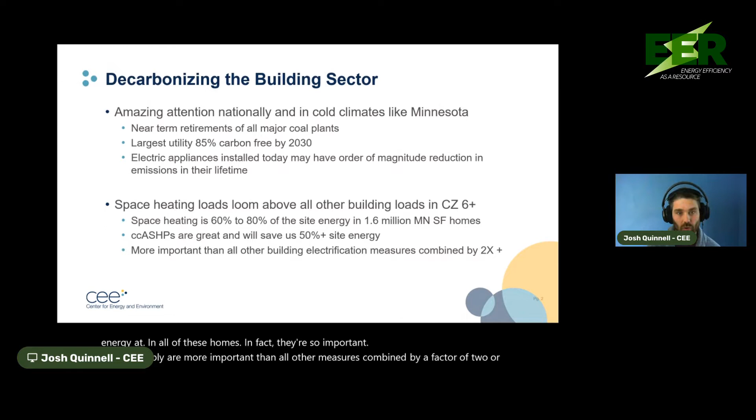But in climate zone 6 and 7, there's only one thing that ultimately matters: space heating load. Our single family homes, all 1.6 million of them, use 60 to 80% of their total site energy budget heating those homes. Cold climate air source heat pumps are a phenomenal opportunity to save 50% or more site energy in all of these homes. In fact, they're probably more important than all other measures combined, by a factor of 2 or greater. It's hard to understate how important the space heating load is and the electrification opportunities from heat pumps.

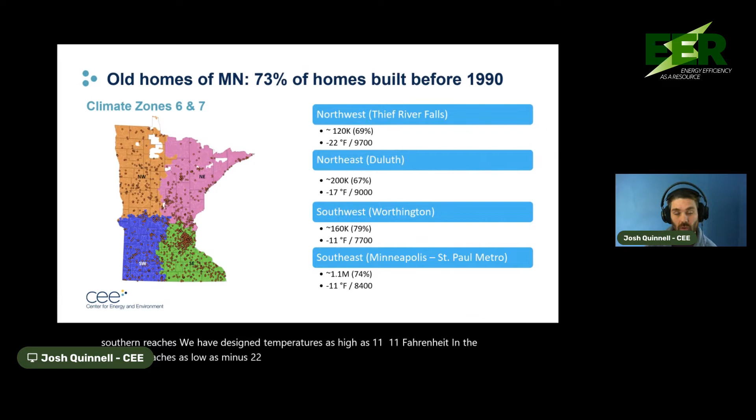Let's talk a little bit about our building stock. 73% of our homes were built before 1990. Our climate, while it varies between climate zone 6 and 7, does see some variation. In the southern reaches, design temperatures are as high as minus 11 Fahrenheit; in the northern reaches, as low as minus 22 Fahrenheit or even lower. Our winter heating load can be defined by heating degree days between about 7,700 and 9,700 statewide.

It's important to call out the southeast specifically. This is where most of our homes are located, corresponding to the Minneapolis-St. Paul metro area. There's about 1 million homes here.

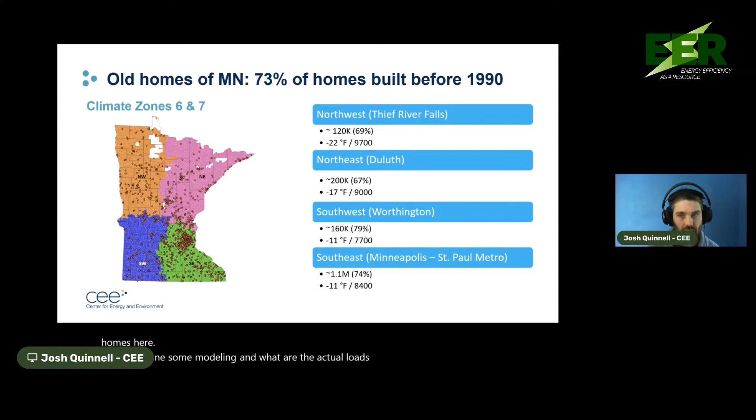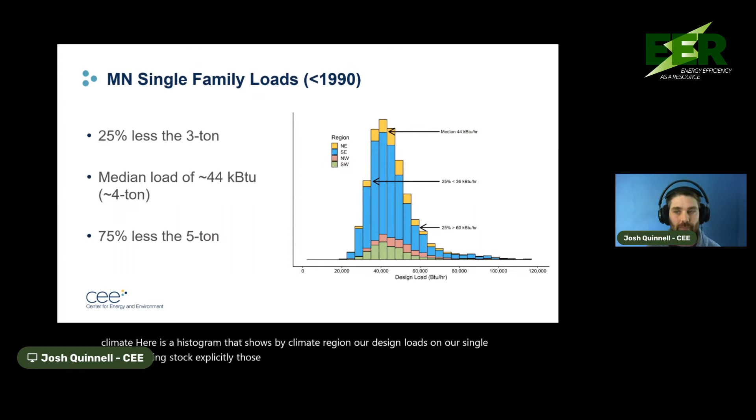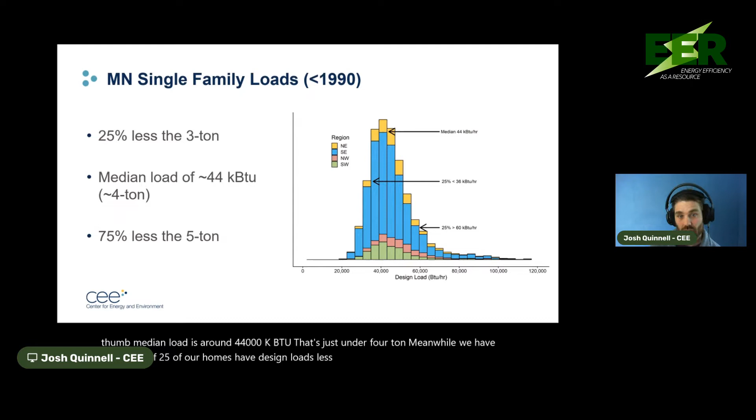So we've done some modeling: what are the actual loads on these homes across our climate? Here is a histogram showing, by climate region, our design loads on the single family building stock built before 1990. The good news is the loads are a lot smaller than we conventionally expect from our rules of thumb. Median load is around 44,000 BTU, just under 4 ton. About 25% of our homes have design loads less than 36,000 BTU, or 3 ton, and only a quarter have design loads greater than 5 ton.

So when we talk about meeting these loads, we need to look at the heat pumps available. I'm showing 3 kinds of heat pumps, a couple in both 3 ton and 5 ton capacity. First is the reference tier, shown in blue curves, plotting capacity as a function of outdoor temperature. We know air source heat pumps lose a fair amount of capacity as it gets cold outside, but the reference tier are variable speed cold climate heat pumps that are strong performers, maintaining fairly good capacity down to 5 Fahrenheit, though they lose capacity below that.

We have another kind called the Capacity Champ—essentially the highest capacity maintenance currently found in the NEEP air source heat pump database. They do a better job maintaining capacity at cold temperatures with strong COP performance. As an upper benchmark, I've also added a fictional transcritical CO2 heat pump, something we might aspire to in the future, though nothing like this exists now. This system meets 90% of its capacity at minus 25 at a COP of 2—a very high performance standard.

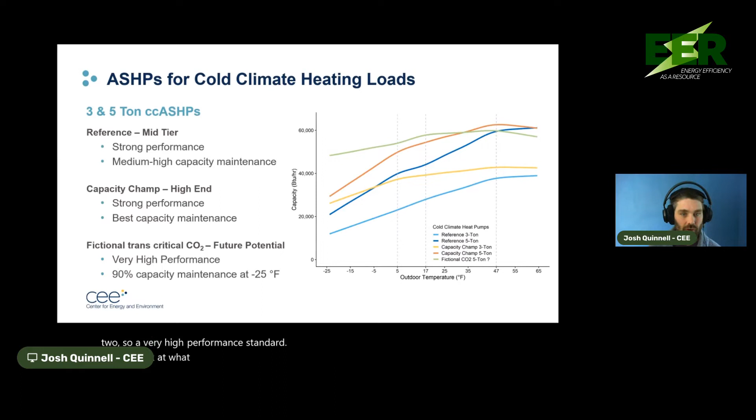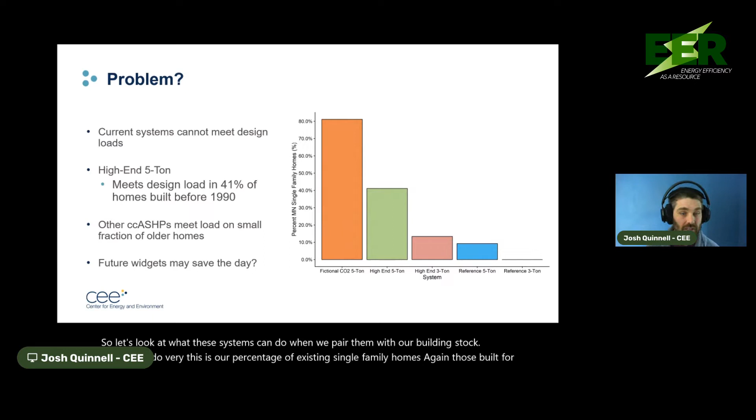So now let's look at what these systems can do when paired with our building stock. Well, they don't do very well. This is the percentage of existing single-family homes, again those built before 1990, whose design loads can be met by these various pieces of equipment. Our fictional system can meet the heating load in 4 out of 5 homes, but that system does not yet exist.

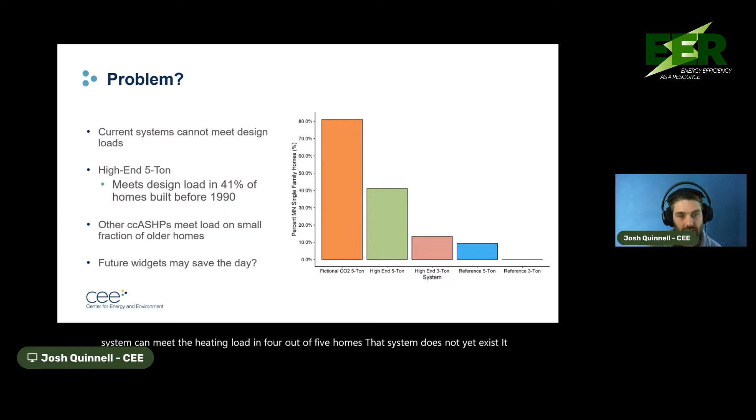It may never exist. If we look at our best system today, the 5-ton Capacity Champ, that can meet design load in about 40% of our existing building stock. All the other systems fare significantly worse. So what's the takeaway here?

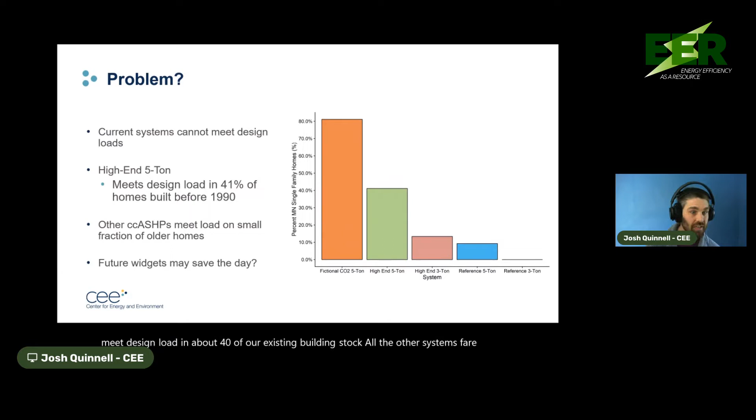We might be saved one day by ultra high performance heat pumps, or maybe we just need auxiliary heat. Here I'm distinguishing auxiliary from backup—we often call it backup heat with respect to air source heat pumps, but when it's electric resistance, I like to call it auxiliary power. Our heat pumps are still going to run in cold temperatures, they just can't put out the capacity our buildings need. So we can supplement that with existing electric resistance, for example a plenum heater that boosts supply temperatures as they tend to fall in cold weather.

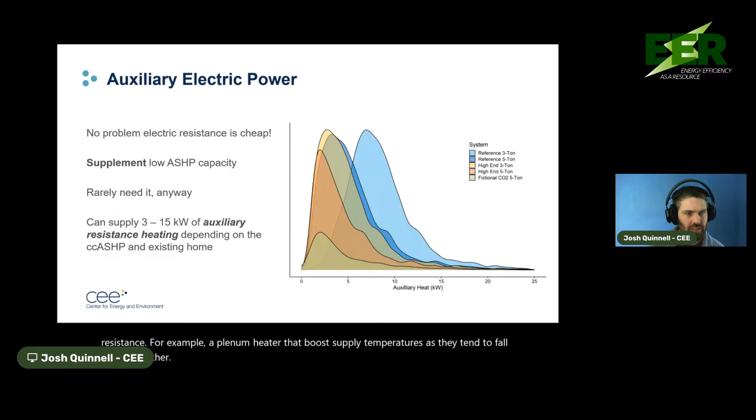This might not be such a big deal because this is our design condition. We rarely need that capacity, maybe 50 hours a year or less.

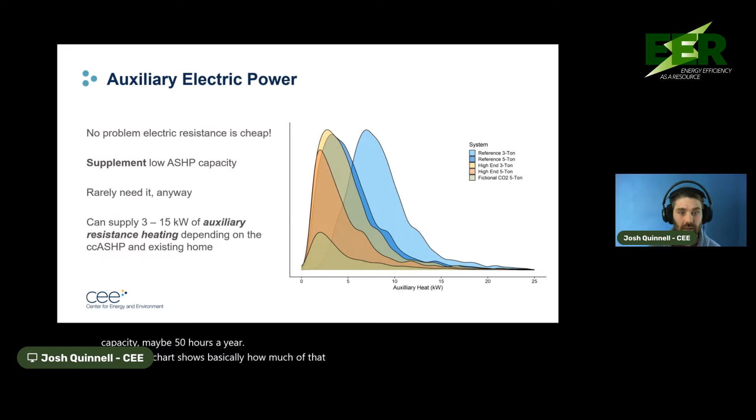This chart shows basically how much of that auxiliary heat we need depending on the systems we install. The bottom line is even this fictional high performance system needs about 3 kilowatts of median capacity across the heating load.

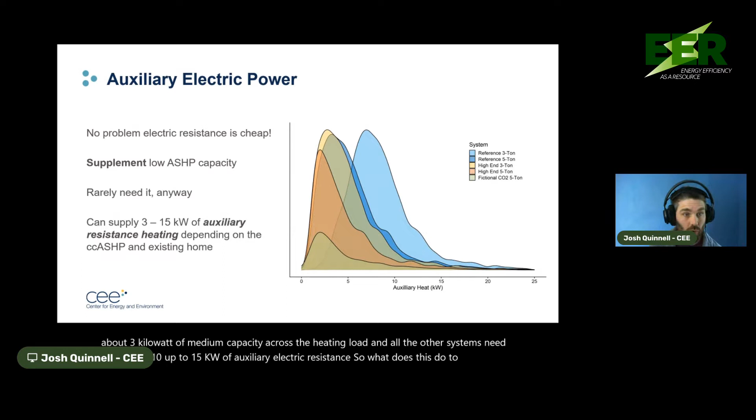And all the other systems need more, 5, 7, 10, up to 15 kilowatts of auxiliary electric resistance. So what does this do to our peak load and the load we're going to eventually ask to be put on the grid? Well, it doesn't look that great.

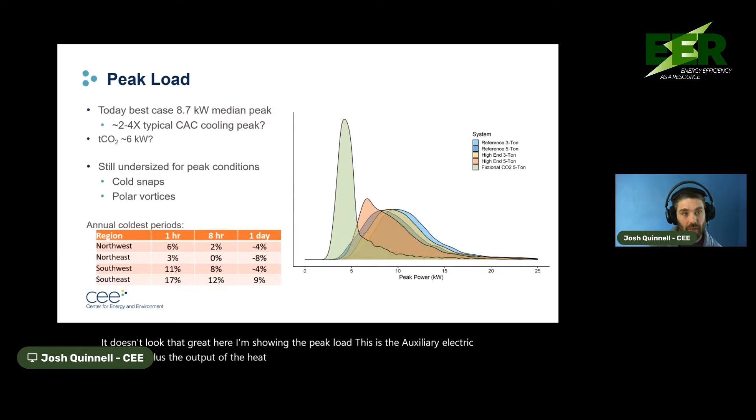Here I'm showing the peak load. This is the auxiliary electric resistance plus the output of the heat pump, the input of the heat pump. Today, if we look at our best case, which is our capacity champ 5-ton system, paired with the necessary auxiliary heat, we're looking at a median peak load of around 8.7 kilowatts.

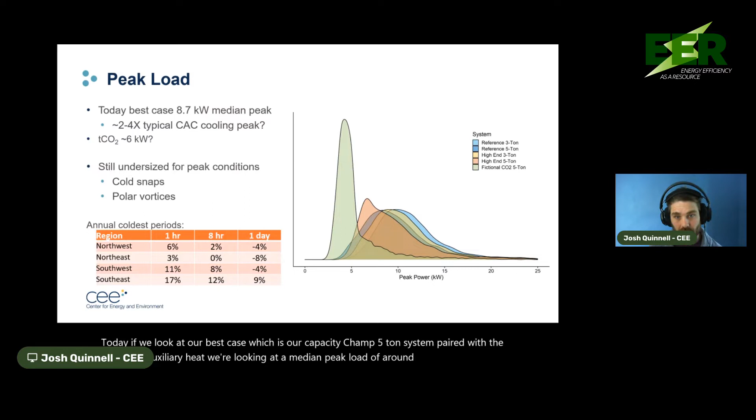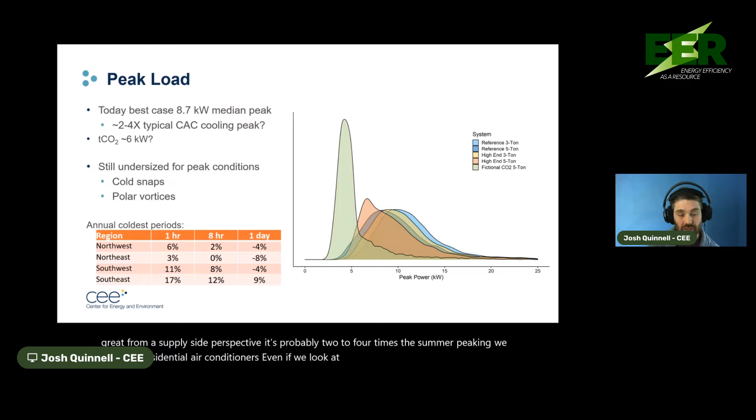This is not great from a supply side perspective. It's probably 2 to 4 times the summer peaking we get from residential air conditioners. Even if we look at this future transcritical system, that's still going to be on the order of 6 kilowatts or greater median peak. And again, this is the median of a population of over 1 million homes.

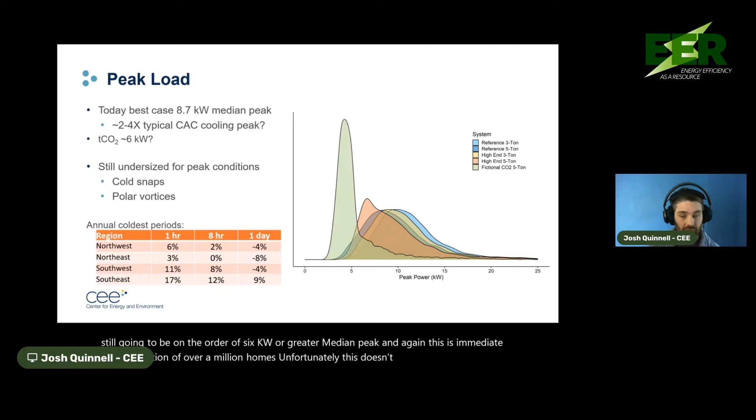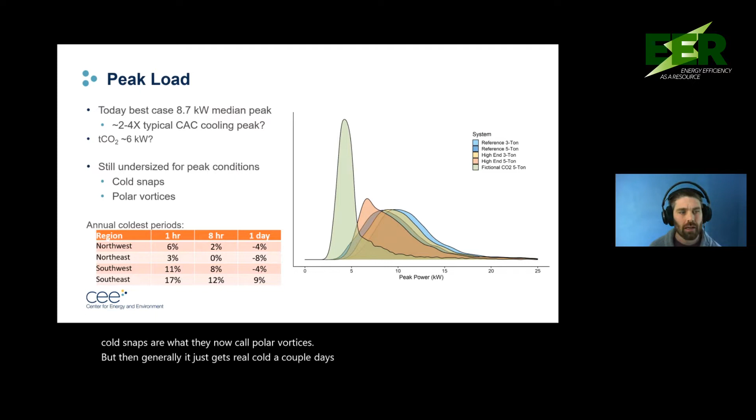Unfortunately, this doesn't quite get it either. We have our design condition, but then we have our peak loads. We have our cold snaps, our what they now call polar vortices. But then generally it just gets real cold a couple days a year in Minnesota. And it gets worse than the design condition.

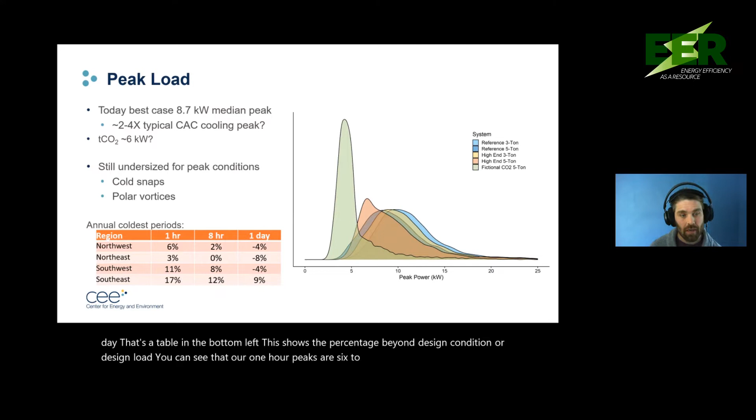If we look at our annual coldest periods by 1 hour, 8 hour, and 1 day, that's a table in the bottom left. This shows the percentage beyond a design condition or design load we get. You can see that our 1 hour peaks are 6 to 17% greater. As we get to longer periods, though, we get closer to a design condition.

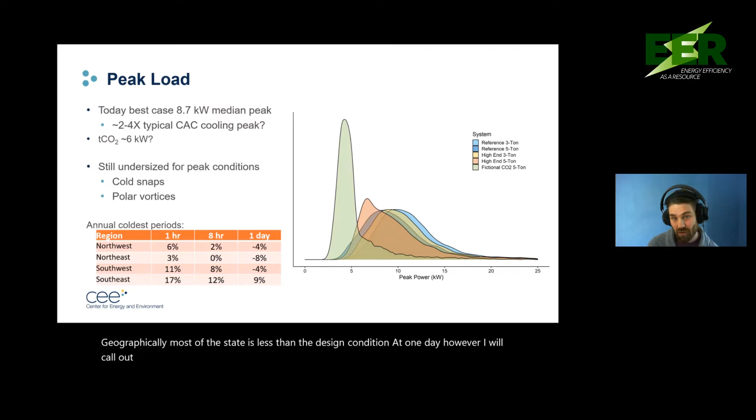Geographically, most of the state is less than the design condition at 1 day. However, I will call out the Southeast. The metro area still is capable of having 24-hour periods that exceed design load by 10%, in which case that 8.7 median peak maybe bumps up to 9.5 kilowatts, which is quite a large load.

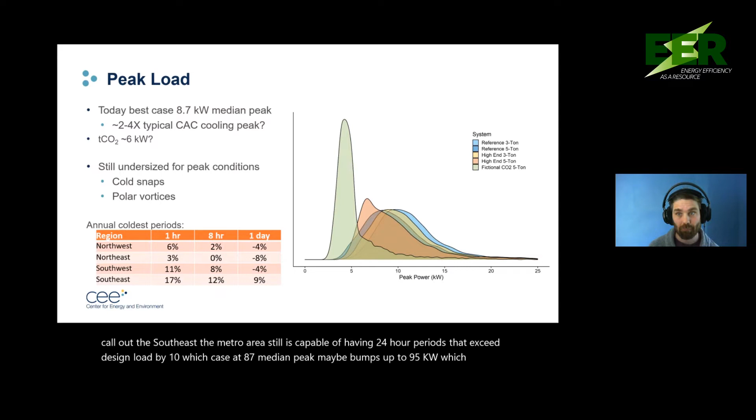So to recap, in the middle here, air source heat pumps are extremely promising for decarbonizing what is our biggest building end use. Unfortunately, the majority of our single-family stock needs substantial auxiliary or very substantial backup. Even with today's best and biggest heat pump, even fictional high-capacity heat pumps will drive unprecedented system peaks.

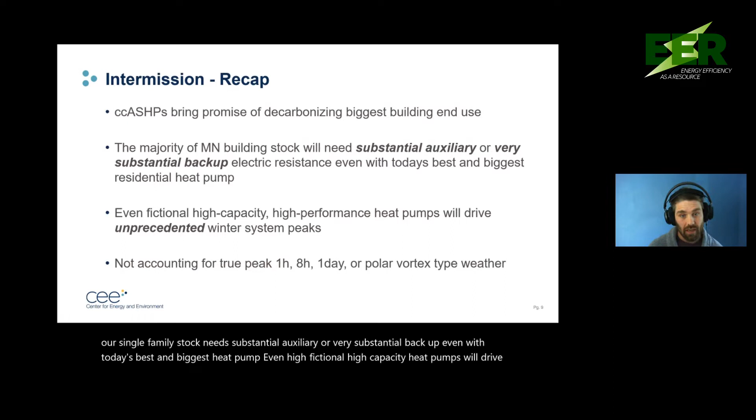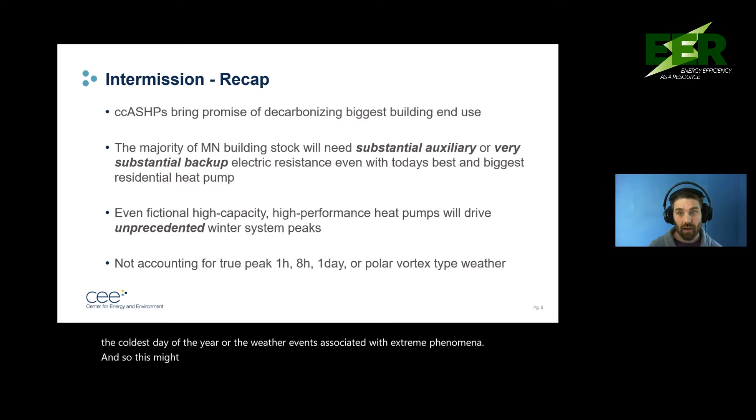And then we have to consider the coldest weather, whether it's the coldest day of the year or the weather events associated with extreme phenomena. And so this might seem kind of dire. It's not, though. Actually, the solution is obvious. It's always been obvious. Maybe you already know from the title of my talk. It's always been about the envelope.

Essentially, we need aggressive weatherization. Weatherization has been extremely successful. We need to weatherize to higher standards, and we need to weatherize on significantly larger scale efforts. And in fact, we probably need to go further and consider actually high performance envelopes.

We have an extremely demanding climate. Low fuel prices have shielded us from the demands of our climate, but we need to think about things like continuous exterior insulation. There's a lot of opportunities to engage these projects in our existing way of doing things.

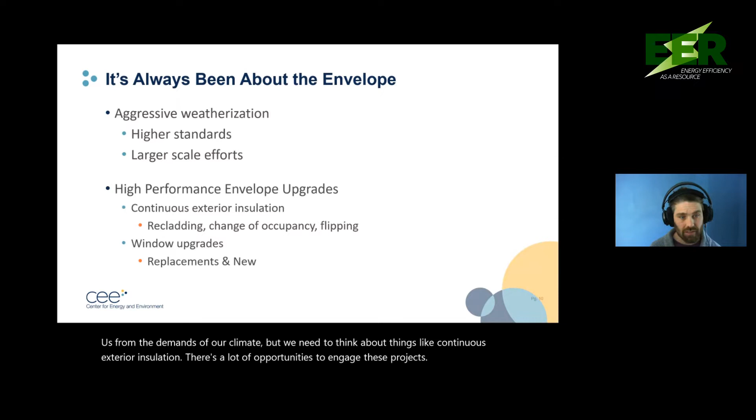We also need to talk about windows. We've been dithering about the cost effectiveness of windows now for an entire generation of windows, and it turns out windows are twice as good now as they are in the existing building stock.

So we have a model. We modeled a bunch of things. I'd be happy to talk with you at length about that.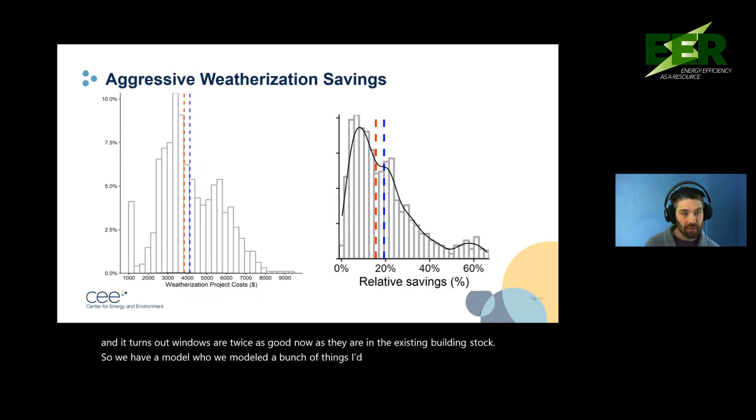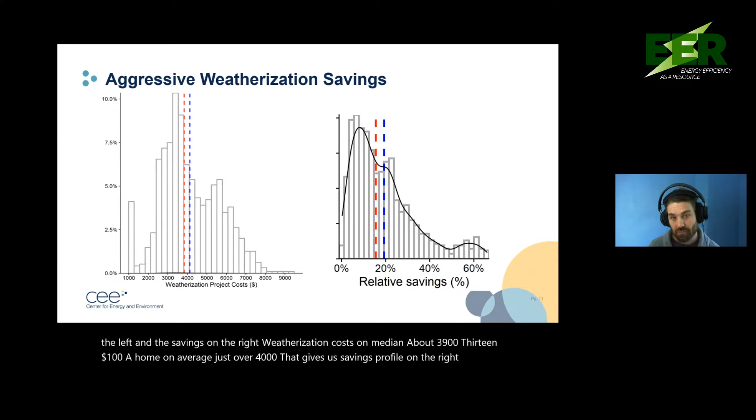This is the bottom line on aggressive weatherization. These are the costs on the left and the savings on the right. Weatherization costs on median about $3,900 a home, on average just over $4,000. That gives us savings profile on the right over about 1 million buildings in Minnesota, 15% median savings, 20% average savings, and a long tail of very low hanging fruit, 30, 40, 50, 60% savings.

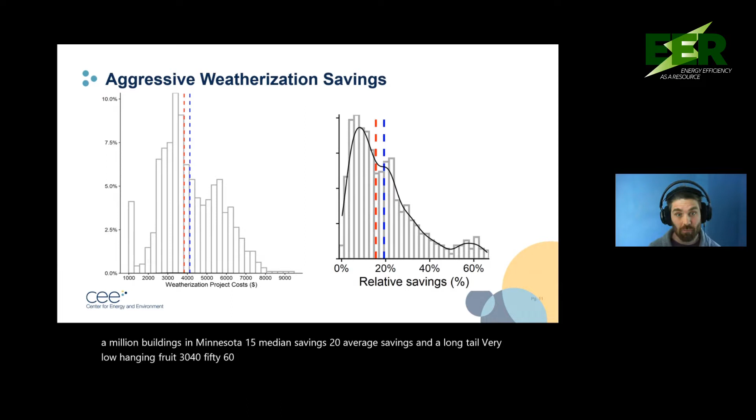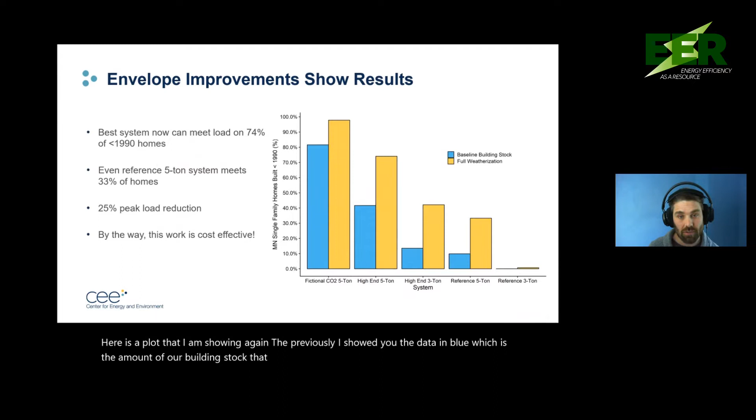And these kinds of savings show tremendous results. Here is a plot that I am showing again. Previously, I showed you the data in blue, which is the amount of our building stock that can be met with these systems. Once we weatherize our buildings, the yellow bars are what we get. So our fictional system did very well. It does even better once we weatherize our homes.

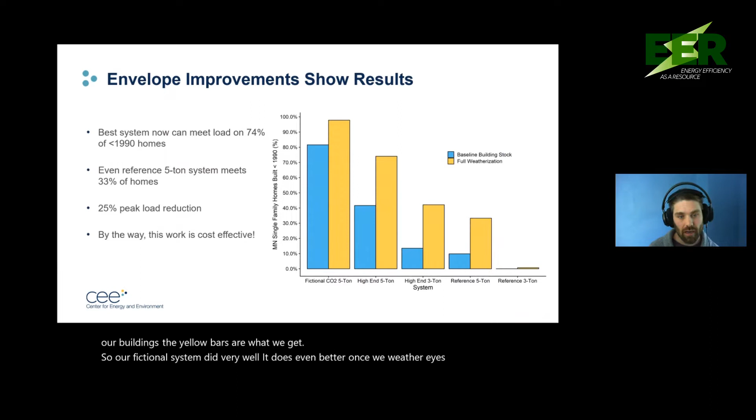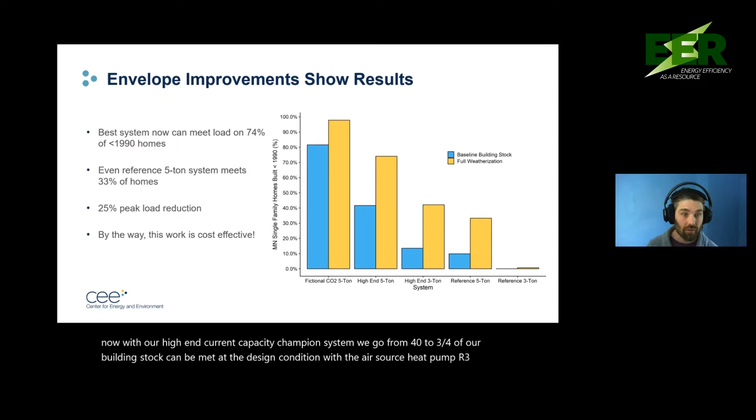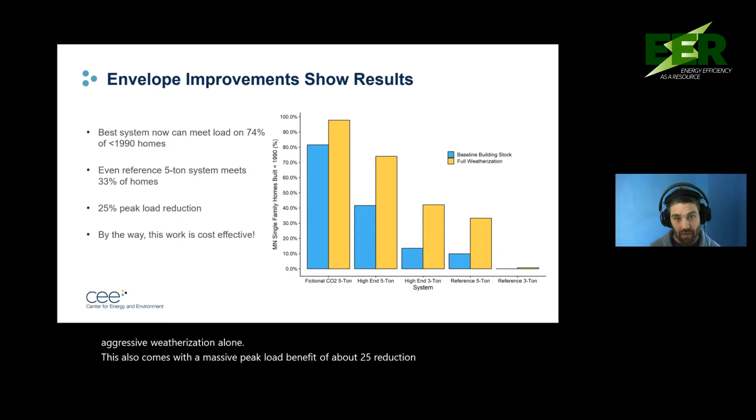But now with our high-end current capacity champion system, we go from 40% to 3/4 of our building stock that can be met at the design condition with the air source heat pump. Our 3-ton and our reference 5-ton are now sitting at 33% and over 40% of our building stock just from aggressive weatherization alone. This also comes with a massive peak load benefit of about 25% reduction in peak load. And by the way, this work is all cost effective today across 1 million homes, according to our application of the current benefit-cost framework in Minnesota.

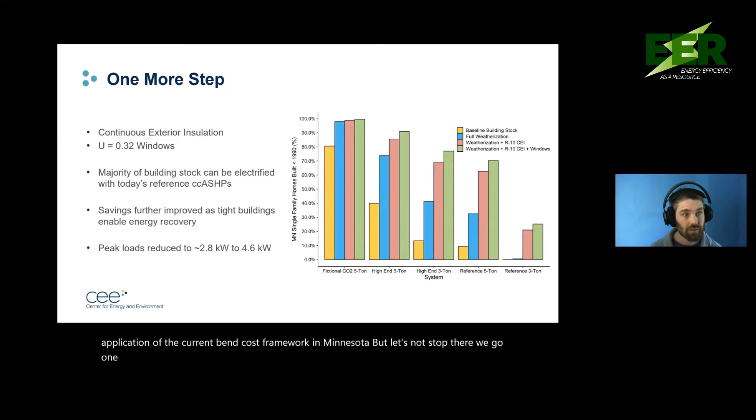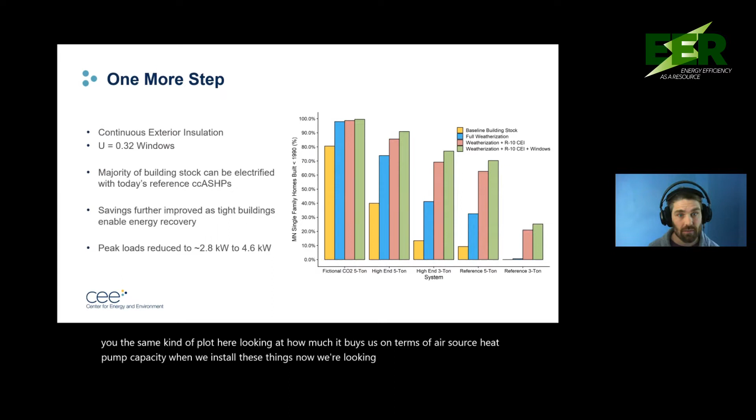But let's not stop there. We got to go one step further and talk about continuous exterior insulation and window upgrades. Showing you the same kind of plot here, looking at how much it buys us in terms of air source heat pump capacity when we install these things. Now we're looking at from today's best systems, upwards of 80 to 90% of the building stock. And even our reference system now sitting at nearly 3/4 of the existing building stock can be met at the design condition with an air source heat pump.

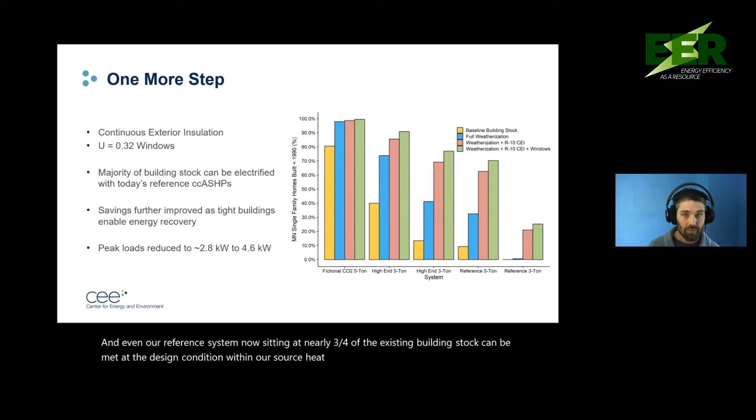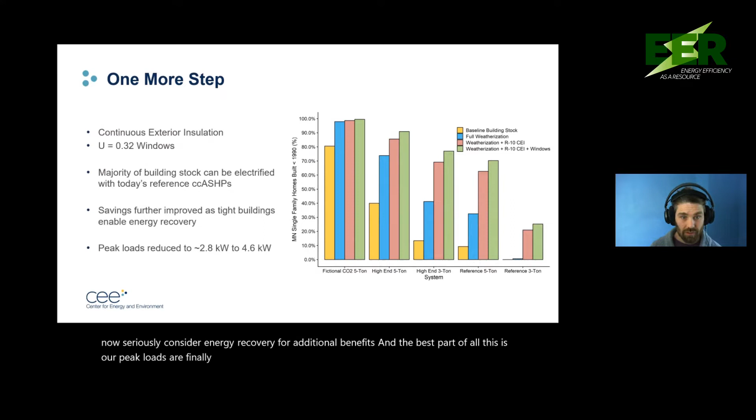This weatherization, this continuous insulation, this also tightens up our buildings so we can now seriously consider energy recovery for additional benefits. And the best part of all this is our peak loads are finally coming down to levels that are more similar to what we see today, 3 to 4.5 kilowatt.

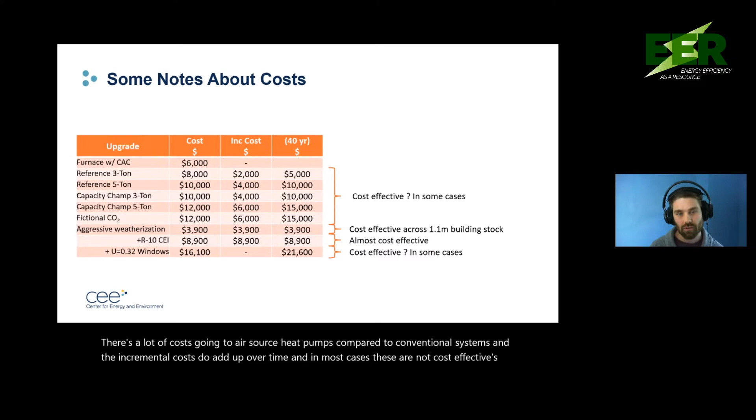One final note here about costs. There's a lot of costs going to air source heat pumps compared to conventional systems, and the incremental costs do add up over time. In most cases, these are not cost effective to save except for propane and electric resistance. Most of our state is heated by natural gas, and this is a real issue with cost effectiveness.

I did mention that aggressive weatherization is cost effective today against propane, electric resistance, and about 20% of our gas heated building stock. Continuous insulation is almost cost effective. There are hundreds of thousands of cost effective opportunities. Windows continue to be a problem.

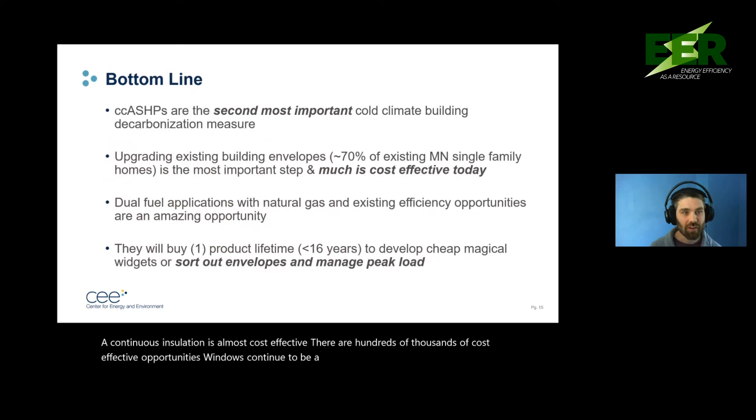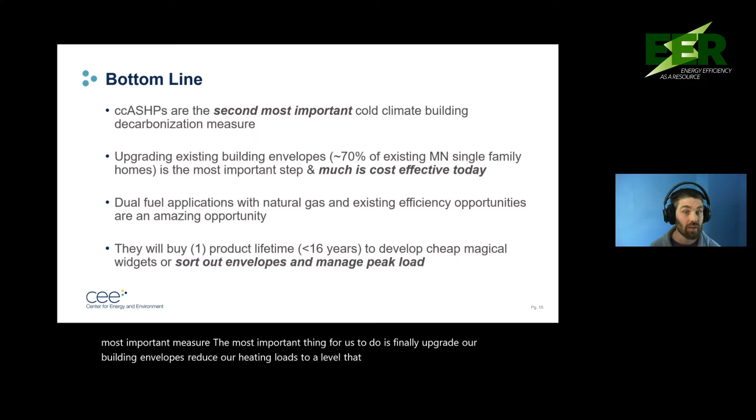I'm running out of time, so I'm really moving here. The bottom line, though, is I misled you up front. Air source heat pumps are not the most important cold climate building decarbonization measure. They are the second most important measure. The most important thing for us to do is finally upgrade our building envelopes, reduce our heating loads to a level that we can meet with heat pumps, that we can meet with supply side investments on our grid.

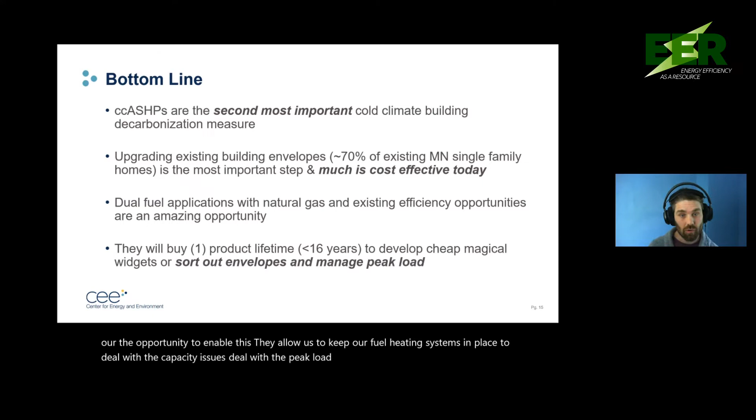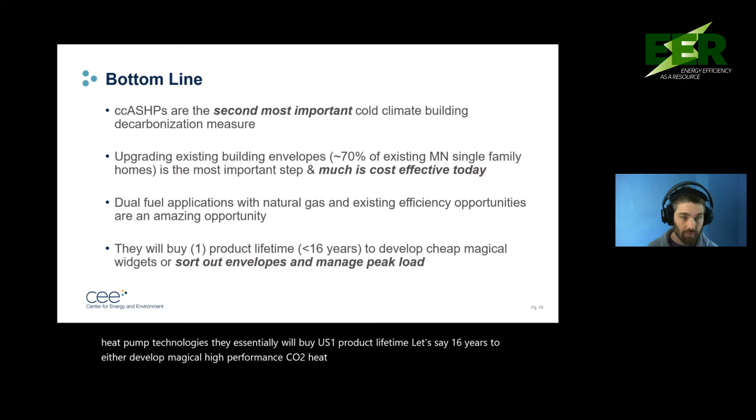Dual fuel applications, which is what we're promoting right now and trying to advance, are the opportunity to enable this. They allow us to keep our fuel heating systems in place, deal with the capacity issues, deal with the peak load issues, while we introduce everyone to heat pump technologies. They essentially will buy us one product lifetime, let's say 16 years, to either develop magical high performance CO2 heat pumps or sort out our envelopes and manage our peak load.

Thank you for listening.

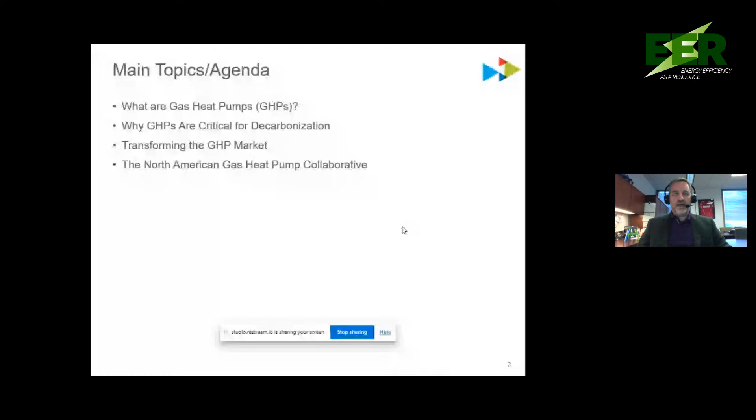Okay, sorry, thank you. So very quickly, I don't plan to get into a deep engineering discussion today, but I do plan to talk a little bit about gas heat pumps. Quickly, what are they, why they're critical for decarbonization, and then a plan to transform the market and how a number of utilities are working together to do that.

Very quick non-engineering analysis of what a heat pump does, gas and electric. Basically, you're taking energy from the actual combustion occurring in the gas heat pump. This is a water heater, for example. You're stealing some energy from the air. Combined together, you get more units of energy than you put in. And of course, you can use different kinds of heat sources like RNG, hydrogen blends, etc., that could play a role in a decarbonized process.

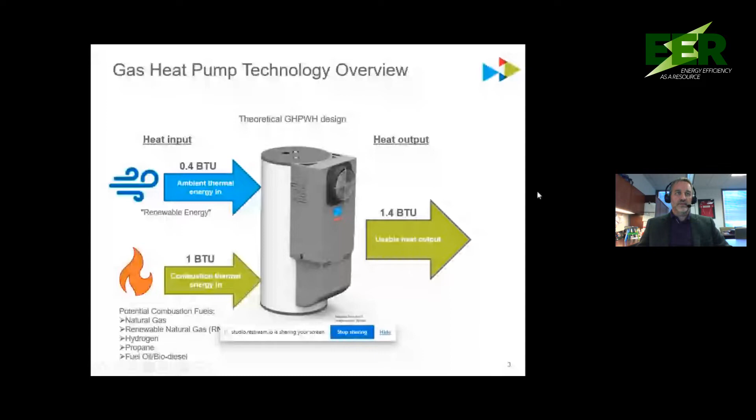There are a number of different products out there. From a residential application, not yet available, but there are commercial units that are available. I'll be talking a little bit about some of these new products coming online here in 2023. I will just state that there have been testing and pilots for residential space and water heating combi units.

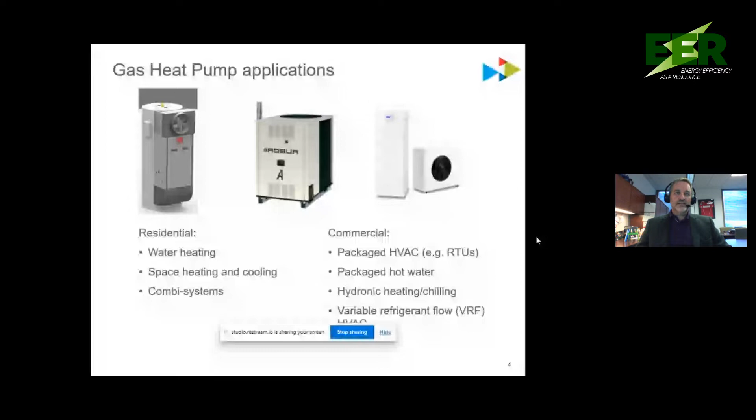They have survived through two polar vortexes, and guys, they work. They work really well. This is a picture of a combination gas and water space heating system. They deliver over 100% efficiency, provide reliable heat, and integrate well within an existing home. They provide efficiency, over 100%. They're affordable because you can easily put these into the system. And they present a resilience play. When we do have those peak loads that Josh was talking about and strain on the energy systems like we've seen in other parts of the country, these are really important to try and shave off that peak.

When I talk about efficiency, I'm talking about, say, a typical furnace at 98, 97% AFUE, we're talking about 130, 140% AFUE. From a water heater, 0.62 energy factor, you're talking about 1.2. So you're kind of doubling or almost nearly doubling the efficiency level of these products.

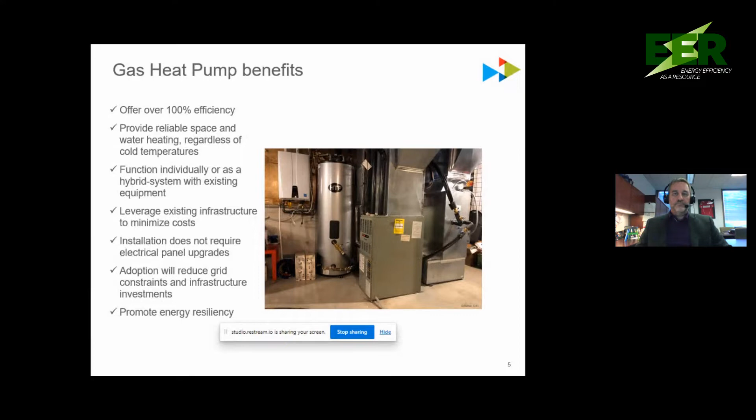And when I talk about decarbonization, what do I mean? Well, obviously, this is a step change in usage. If we're reducing usage by half, that's a big impact on just gas usage. When you put a cleaner fuel in there, say RNG, hydrogen blends, you're really starting to talk about a net zero play. And I might mention that the refrigerants used in these devices have very low global warming potential, unlike maybe the electric systems.

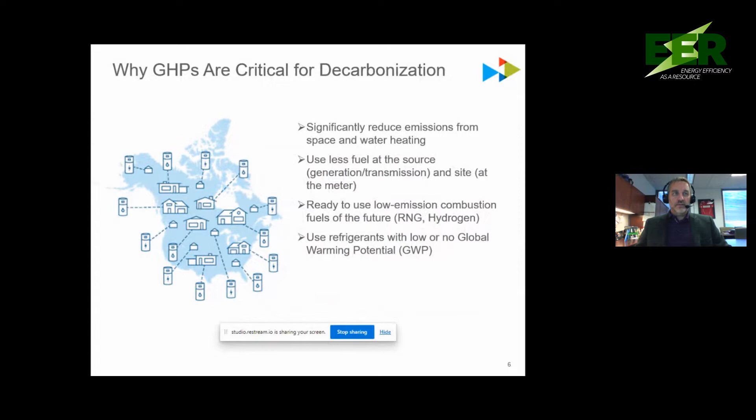So what are we trying to do? We need to look at a different way of bringing these products to market. We need to look at market barriers and get away from the typical approach. I think most of us in the energy efficiency world might just sort of slap a big incentive on the side of it, kick it out the door and say go and do good. And guess what, sometimes that works, sometimes it doesn't. So we need to look at a different way of addressing the market. What are the different aspects that might be issues that we need to overcome? How do we identify those issues, and how do we eliminate them so these products can move?

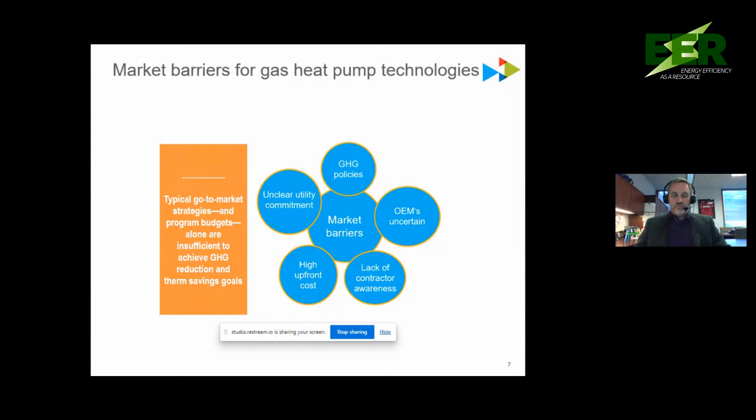So this is really about eliminating market barriers as we go forward. What we've done is create a collaborative, the North American Gas Heat Pump Collaborative. The purpose of that is to bring new technologies to market, get them in quick, and make a difference. This collaboration has an opportunity to create a clear message to the manufacturing market and other actors in this space, to basically say we need these products, we need them now, and we're going to work together to make it easier to adopt.

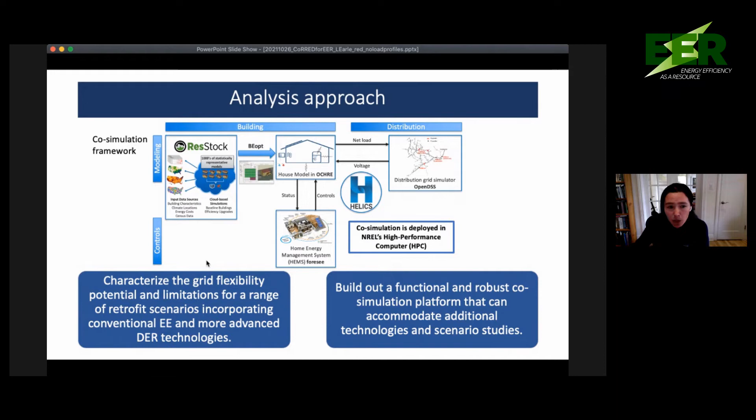Using this framework, we explored the different retrofit scenarios, including the operational characteristics of the homes in this neighborhood and their impact on the distribution system. We chose the Central Park neighborhood in Denver to base our simulations on.

There are a couple features of Central Park that made it particularly attractive for this type of study and for considering this type of retrofit rollout. The first is that the majority of the homes here were newly constructed in the early 2000s, which means that the major equipment like HVAC systems and water heaters in these homes are just approaching end of life. This first equipment replacement cycle is a pretty unique window of opportunity for a community retrofit strategy, because it might be the only time when the replacement cycle is synchronized across many homes. The other reason is that this is a relatively new neighborhood, so there's a higher likelihood that the distribution infrastructure could accommodate electrification upgrades.

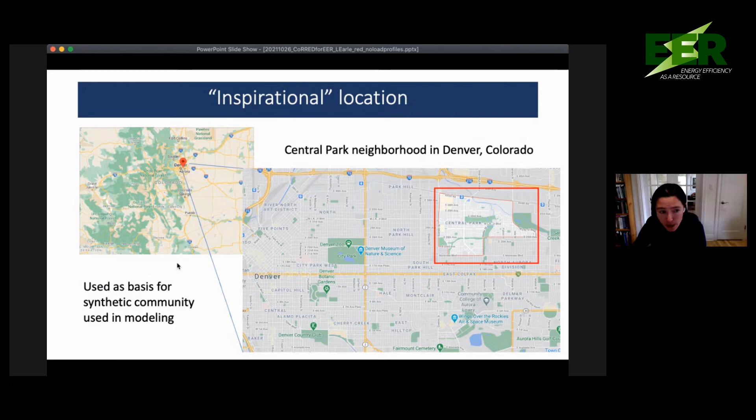Scenario 1 here is the conventional retrofit flexibility. Using the BEopt modeling tool, we determine the cost optimal package just based on simple payback of conventional energy efficiency upgrades to apply to the entire neighborhood. For this scenario, we assume that there are no additional DER technologies, no controls, no PV, and this can be seen as kind of a lower limit to show how much load flexibility is possible in a mostly business as usual case. Scenario 2 is what we call efficient electrification.

Here we eliminated the natural gas appliances and electrified each home. Instead of looking for the cost optimal retrofit package, we chose the most energy efficient measures that minimize the annual electric use per home. We explored this scenario with and without DERs and controls, corresponding to sub-scenarios 2A and 2B.

Scenario 3 is electrification without efficiency. This is a totally different electrification scenario where we just replace the natural gas equipment with electric counterparts without any efficiency improvements. The only energy management strategy here is load shifting, and we're buying the least expensive equipment rather than the most efficient. This scenario was analyzed with and without DERs and controls, and also with and without rooftop solar.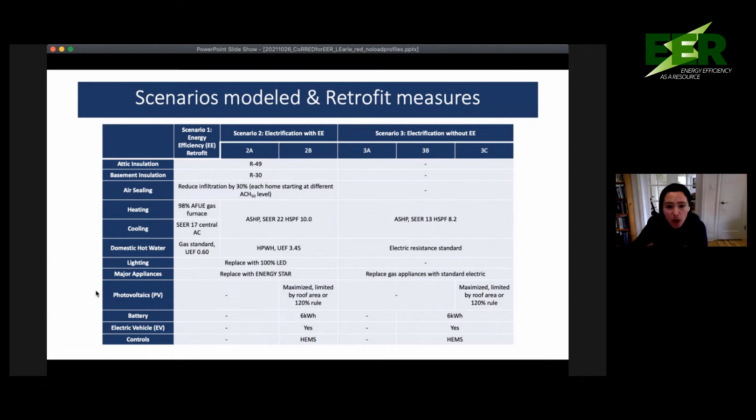Okay, so here's a snapshot of some results. I regret that we don't have enough time to go into all the details, but I just want to show you what the utility bills start to look like when you compare all these different scenarios. Here are bar charts that summarize the utility bill impacts of the baseline, scenario 1, and scenario 2 retrofits.

As a reminder, scenario 2 is efficient electrification. We are using Xcel Energy's time of use rates in our analysis, and the bars are color-coded by end use and averaged across 30 homes. The black line with the dots across the bars represents the net bill, and this is useful for looking at scenario 2B, in the lower right, where the solar panels offset the bills quite a bit to the point that your monthly bill is less than 0 for roughly half the year.

So let's look at scenario 2A. If I were to show you corresponding graphs plotted in energy units, you would see that the efficient electrification scenario in 2A actually uses slightly less source energy than even the conventional energy efficiency retrofit in scenario 1. But on an annual basis, the utility costs to the homeowners are nearly identical to the baseline because of the higher cost of electric heating in the winter that offsets the cooling savings in the summer.

In other words, because electricity is more expensive per unit energy than natural gas under current rates, a conventional retrofit, which is scenario 1, can save money on monthly utility bills relative to the baseline, whereas an efficient electrification, scenario 2A, is approximately cost neutral in terms of energy bills.

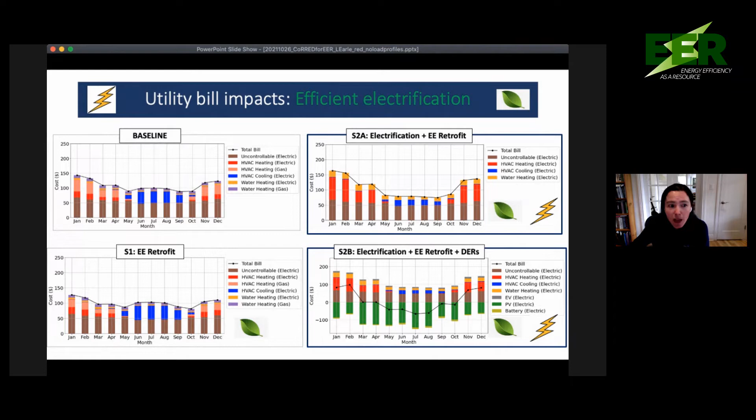Let's compare this with what we're calling inefficient electrification, or electrification without any energy efficiency measures. The key takeaway from this slide is that electrification without energy efficiency results in some pretty high electric bills. Scenario 3A, in the lower left, is kind of a non-starter. Without efficiency upgrades and without any other DER tools, you end up with roughly 40% higher utility bills for the homeowners.

Scenario 3B includes some DERs, including a HEMS, an EV, and a battery, but no PV to help power the electric loads. So the addition of EV results in energy use increase over 3A, making this the highest energy using scenario in our study. But the HEMS is able to reduce some energy use for heating, cooling, and water heating by operating at the edge of the flexibility band for comfort. And the battery helps with a little bit of arbitrage. So the scenario has slightly lower bills than 3A despite the overall energy use increase.

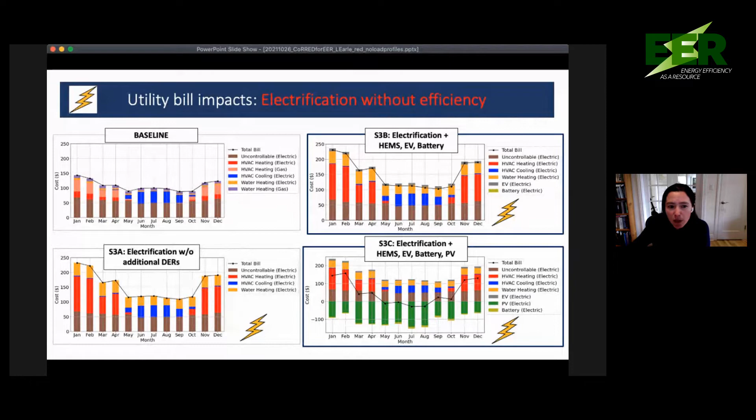And then scenario 3C starts to look a little bit better when we add PV to these homes. There are times of the year when this community can export power, especially during the summer months. Homeowners in this scenario still have utility bills to pay, but they're roughly 60% lower than they would be without PV. So I only showed a tiny sample of our results focusing on just the utility bills, but to summarize, here are the most important broader takeaways that we learned through this work.

One is that electrification can be achieved without negatively impacting the utility bills. We saw that.

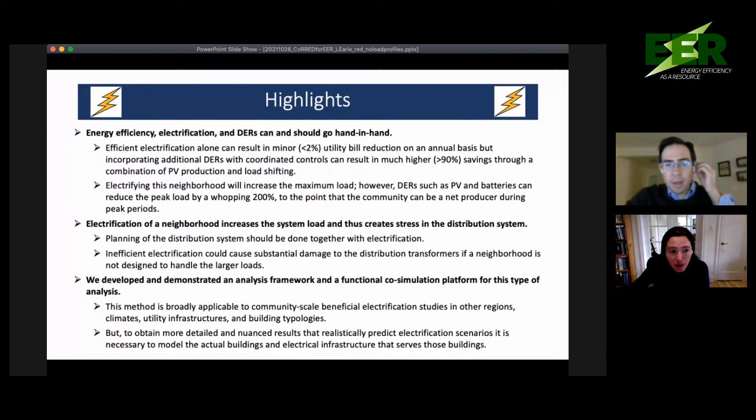Electrification can be achieved without negatively impacting monthly utility bills. We didn't have time to show the distribution system impacts, but our results demonstrate that incorporating efficiency can be an important tool, paying attention to key metrics like house-level voltages and distribution transformer loading. Electrification of a neighborhood increases system load and creates stress, so planning for the distribution system is a crucial component of any electrification efforts.

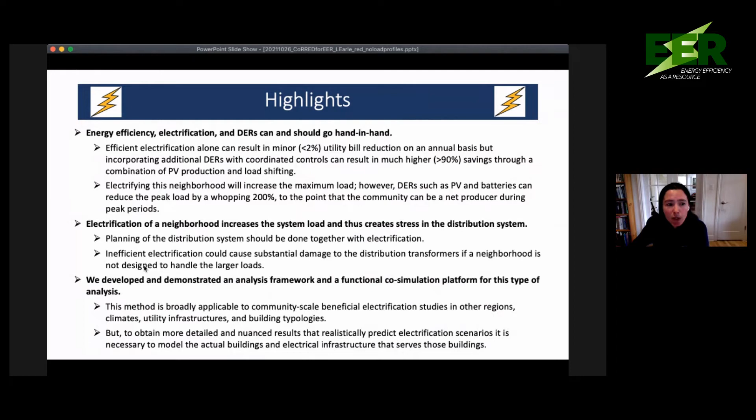There are several interesting topics for discussion. The cost of electrification - we saw that efficient electrification can save on utility bills, but you have to figure out how to make the technology affordable. The practice of sizing PV systems based on a home's past energy bills can be problematic when a home also undergoes electrification, since you're adding electric loads that didn't exist before. So it seems like those kinds of rules need to change.

Evolution of parameters - for peak load management, if you electrify a neighborhood and still use batteries and PV to reduce the summertime peak load, the community can become a net producer, as long as surrounding communities aren't yet electrified. But looking forward, if the broader system transitions along with the neighborhood, the entire distribution system could face winter peaks occurring primarily in the early mornings. In that case, PV wouldn't be able to shift the load meaningfully. These are interesting things to think about regarding the relative value of different DER technologies.

Finally, in our simulations, the HEMS algorithm based its control decisions on occupant comfort and the cost of energy to the homeowner - in other words, just utility bills under TOU rates. But it would be worthwhile to explore how prioritizing other benefits, like carbon emissions reductions, might alter the overall load profile of a home, and the impact of these changes on other benefits. I'll quit there, thank you.